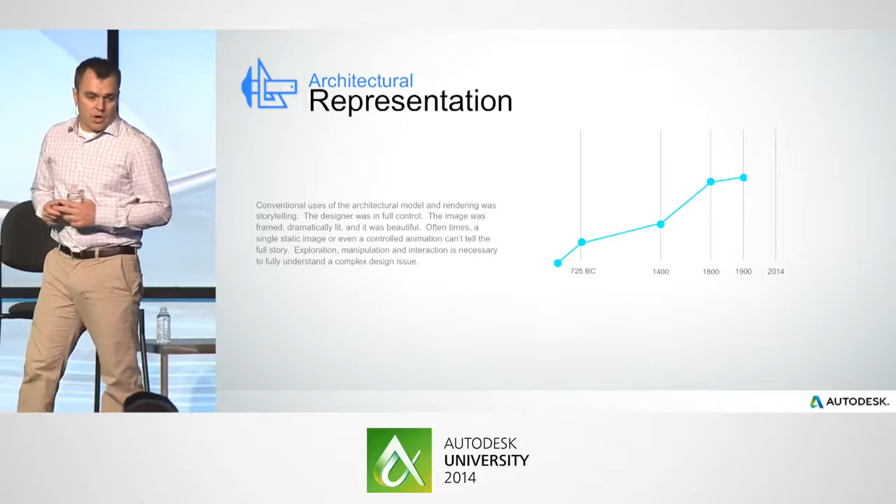Architectural representation: we've been designing and building structures for an eternity. And as long as there's been those built structures, there's been the need to communicate the ideas and concepts behind them. For just about as long, we've been representing these ideas in pretty much the same fashion.

725 BC, the Greeks were communicating design ideas with just their words and scale models. For the next 2,100 years, up to 1400 AD, and through the Renaissance era, some basic drawing conventions were developed. From 1400 AD to today, the basic representations still commonly used today were solidified: the floor plan, the building elevation, the building section, and the perspective.

Through the majority of the computer era, we leveraged the computer to make the drawing and representation of architectural design more efficient. However, we didn't really evolve the process itself. We just made it more precise and more efficient. This is where we still struggle today.

Not everyone that is embedded in these forms of drawing on a daily basis understands them. And oftentimes, those that don't understand it are the ones that it's totally crucial that they understand it, that being the users and the owners.

The widespread use of 3D computer graphics in architectural illustration in the past few decades has helped client understanding immensely.

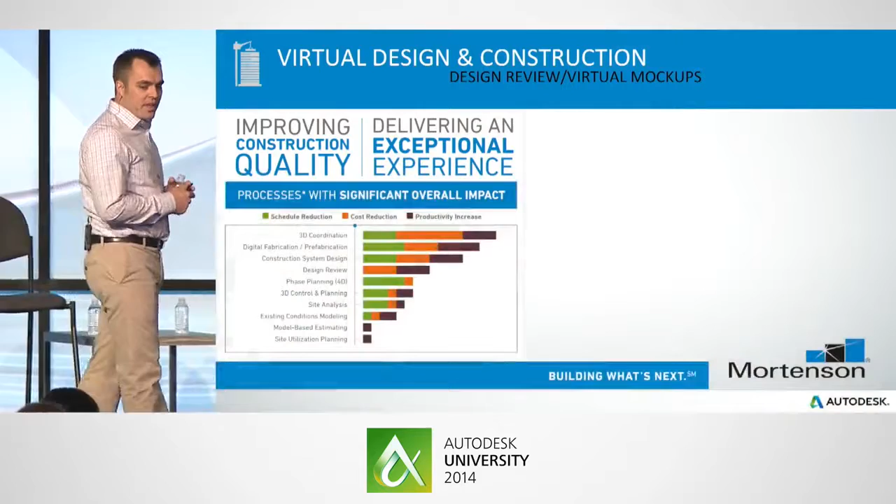A question might be then, why is a general contractor interested in enhanced visualization as part of the virtual design and construction process? This year at Mortenson, we did a research project on our application of virtual design on a lot of different projects. Of our 10 primary VDC processes, the design review with our clients was found to be an integral part of our projects, leading to cost reductions and project efficiency.

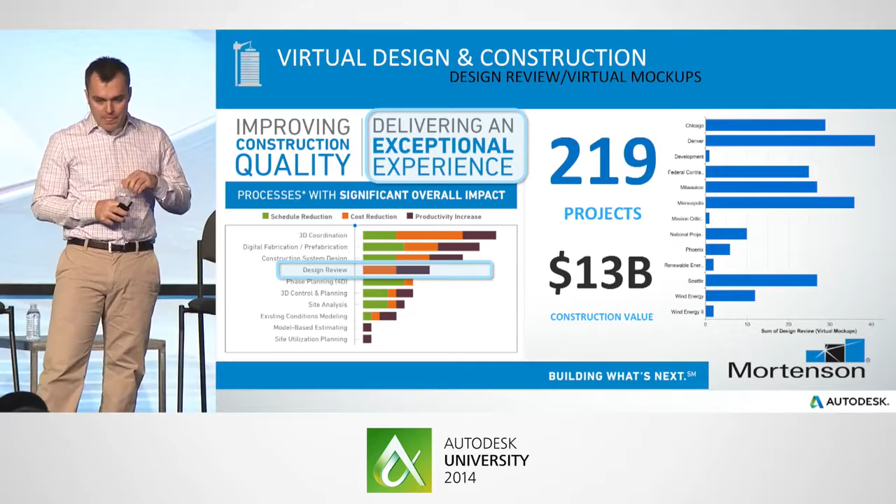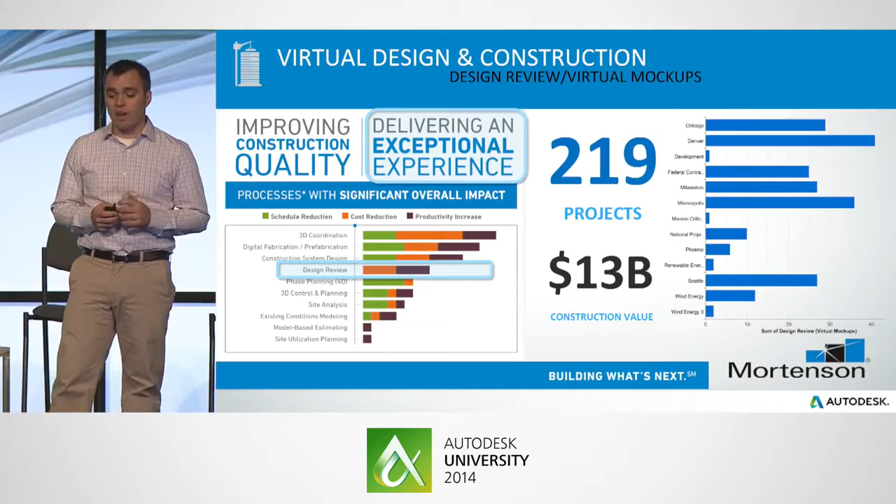By ensuring that we get everything we can out of the design review, we increase our chances of ensuring that the owner fully understands what they're about to spend their money on. Effective design reviews in the design stages also make project teams more efficient by decreasing the architect's chances of having to redraw, or even more costly, the general contractor's chances of having to tear out and rebuild. In the end, both cost reductions and productivity increases provide a better experience for our owner than could have otherwise been realized.

Our goal for design reviews is to enable enhanced decision making. We want the users of the projects to feel like the first time they walk in the building, that it's not really the first time, both aesthetically and functionally. We have found that the more real-time feedback we can provide and the more interactive the review can be, the more effective the review is and the more accelerated the whole process is.

Not until relatively recently have we been able to easily facilitate a real-world perception of distance and scale digitally. There have been solutions for a while, but accessible, affordable, and portable solutions like the Oculus Rift have allowed us to achieve this need. Virtual design reviews have also contributed to reduced cost in physical mock-ups, as a fully detailed virtual mock-up is far less expensive to build than even a partial physical mock-up. It is also easily modifiable and has the potential to be interactive.

In fact, interaction is key to this use and holds proof that a more engaging, memorable, and valuable design review is achievable with more immersive experiences. The interactivity of these solutions is where the true benefit lies.

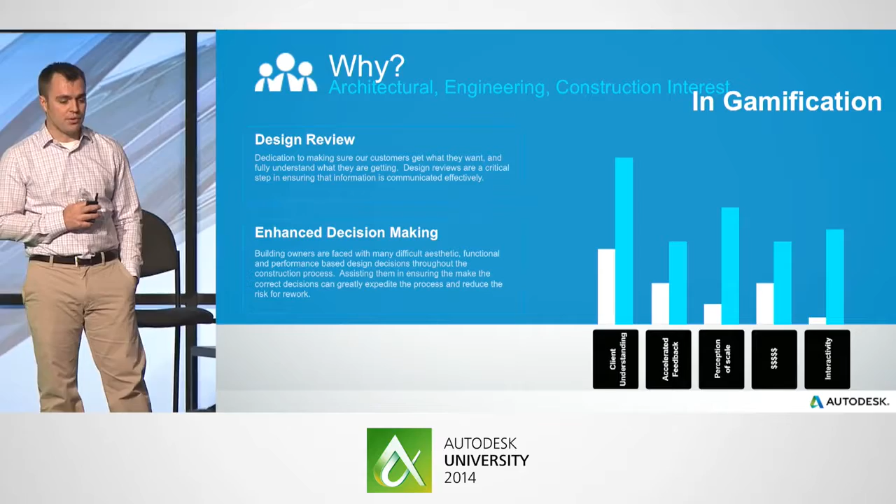As a builder, over the past decade, as we've kept a close eye on more innovative approaches to the conventional 2D and 3D design review, we have strived to ensure that various methods we've looked at make sense. That's where a research project we did recently with the University of Minnesota Architecture Department facilitated this whole thing into really starting to make sense. It questioned the applicability of not only gaming approaches to the design review, but also more immersive approaches.

Because we measure the performance of our processes and teams to drive value-add outcomes, we see it as crucial to ensure there are beneficial ties to more enhanced visualization techniques. This past spring, a graduate student named Will Adams looked at spatial cognition in virtual reality by developing an evaluation technique for our common representation methods in design review.

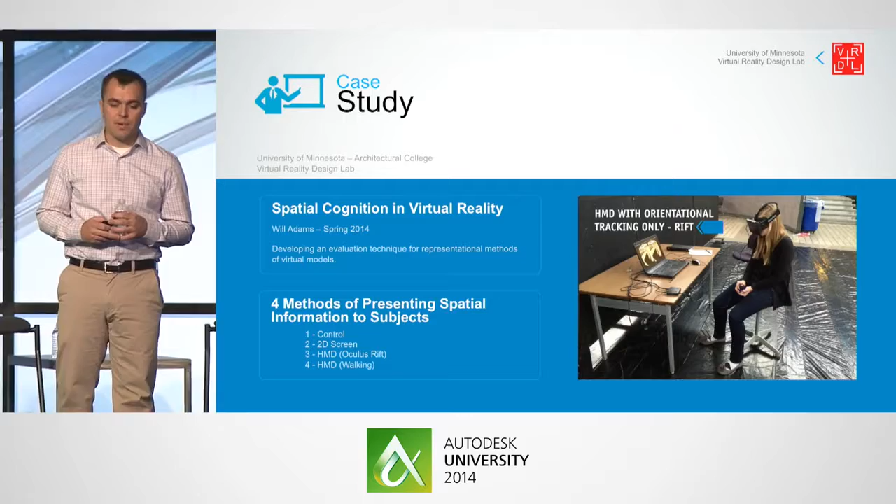The same process took place under a second scenario, except that the subjects were left to assess and recreate the arrangements on a 2D screen. A third scenario took place where they went through the same process with a head-mounted Oculus Rift display in a seated position. And finally, in a fourth method, the subjects made use of a more immersive virtual reality application where they were able to walk and explore the arrangement. They still had a head-mounted display, but they were able to physically navigate.

So the findings of Will's research: he took measurements of each subject's arrangements and documented them based on how much overlap, or lack thereof, was created from the original layout to the layout that the subjects captured with their mind's eye.

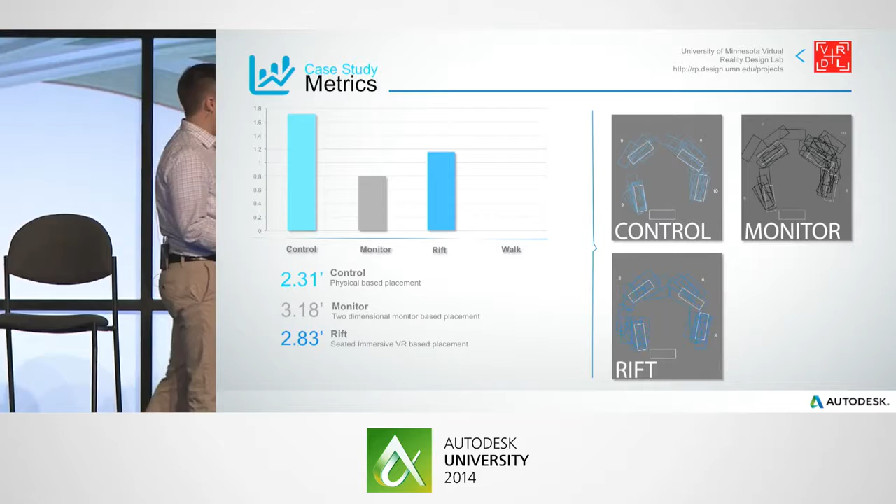So the first situation, the control or physical-to-physical scenario, had the least amount of overlap in the arrangement. The 2.31 feet, as Will mapped out everything they had laid out, was the amount of miss they had in the physical-to-physical scenario. The second solution, the monitor, where we most commonly review our virtual mock-ups, showed 3.18 feet of overlap. The next scenario, the seated Oculus Rift situation, showed 2.83 feet of overlap.

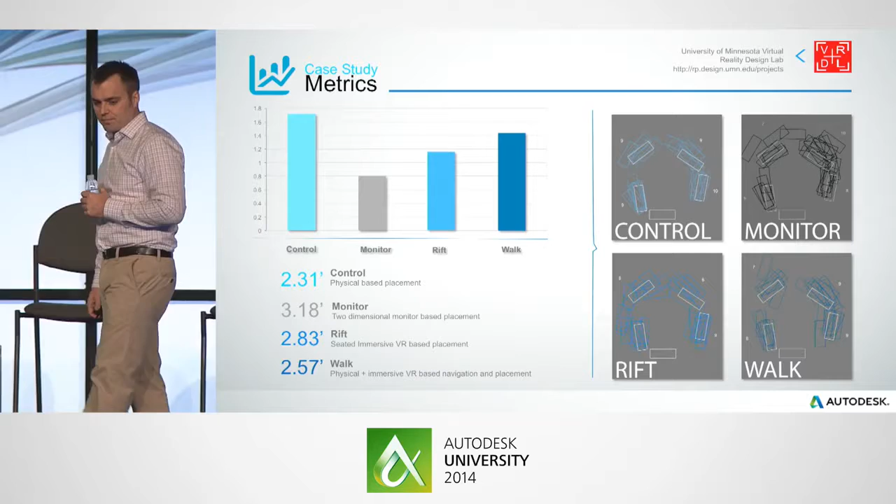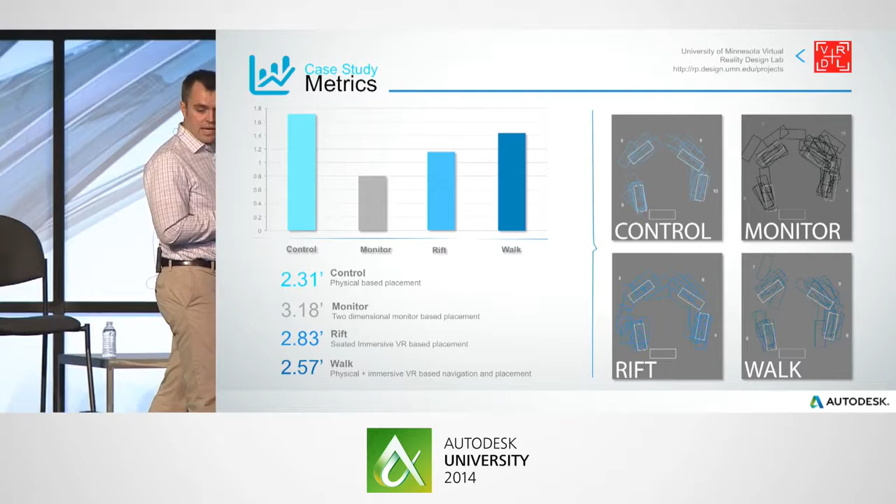And then the final, the walking immersive condition, showed 2.57 feet of overlap. So the outcome of this study resulted in solid proof of concept that a more immersive design review, which was the walking VR solution in this situation, enhances spatial understanding and recollection, thus providing a basic foundation for our approach to leveraging alternate technologies to the traditional 2D design review.

Okay, so some real-world applications for us. The following are benefits we have seen from gaming applications in AEC visualization that we feel would not have otherwise been realized, or would have been much more difficult to accomplish without a gaming workflow. Each application is a different project type with different VDC objectives.

These prototypes were reviewed not only by the leaders of the organization, but also by the users. The mock-ups provided assurance that not only the look and feel was correct, but also ensured them, especially the caregivers, that the medical device placements were correct.

Next example, at the Minnesota Vikings new stadium that's under construction right now, the team made use of Lumion early on in the project. Lumion's built on top of a gaming engine called Quest 3D, so it's not full-blown gaming, but it's still using gaming to leverage our workflow here.

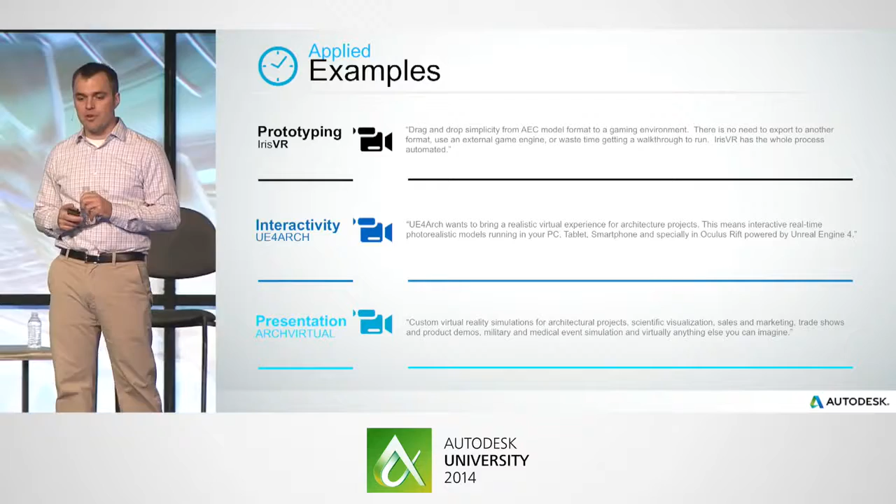Okay, so a few other real-world examples outside of Mortenson. In these, I'm going to show you how technology is being leveraged to produce visualizations that further enhance communication and understanding. All right, so we'll cue the first video here.

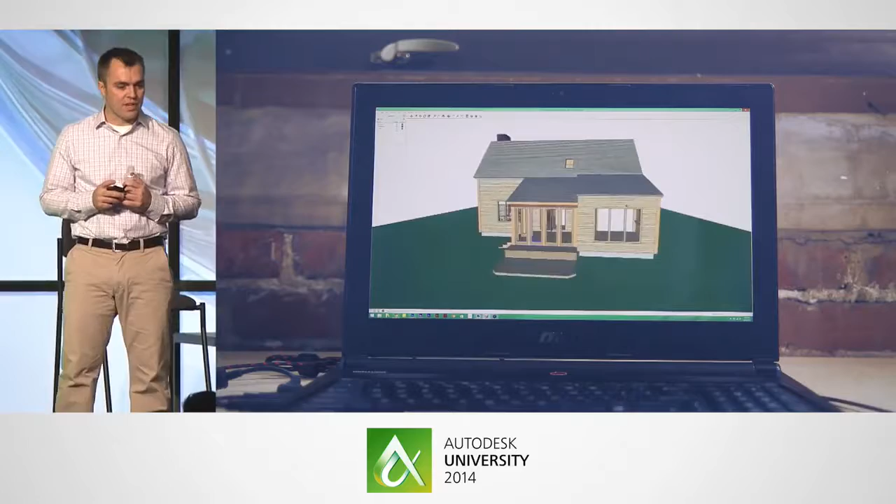This is from IrisVR with a tagline, 'Inhabit your designs.' IrisVR is a startup company that has realized the value and potential of VR applications for the AEC industry. At the same time, they recognize that the true need is not as much to produce gaming environments, but to enable their users to do it easily and quickly.

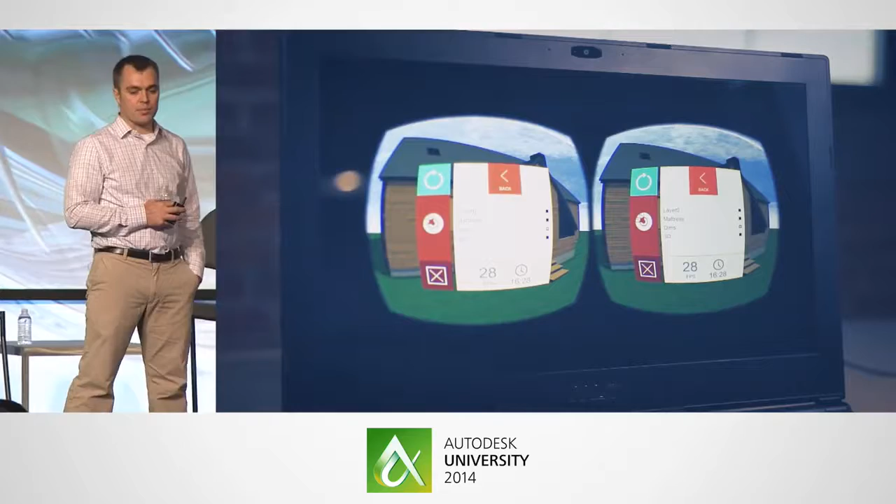If we are making use of this technology in a design review, our process can't be change and wait, change and wait. It's got to be change and assess. By allowing us to speed up this process, by letting the computer do the back-end work of porting a design model to a gaming engine, making unexpected changes becomes a lot less time-consuming and can be accommodated during a design review. IrisVR currently has a beta product that is compatible with SketchUp and is working towards a final product that allows Revit models to be integrated directly with their software.

In the next example, which is from a company called UE4Arch, they're a company that sees the potential in VR technology in the AEC industry.

The example on screen right now is an example of where I hope we'll probably be a few years from now on the common project. What UE4Arch is doing as a company is striving to deliver architectural experiences to projects while doing it in real time. They're producing some extremely compelling interactive content developed specifically for the Oculus Rift.

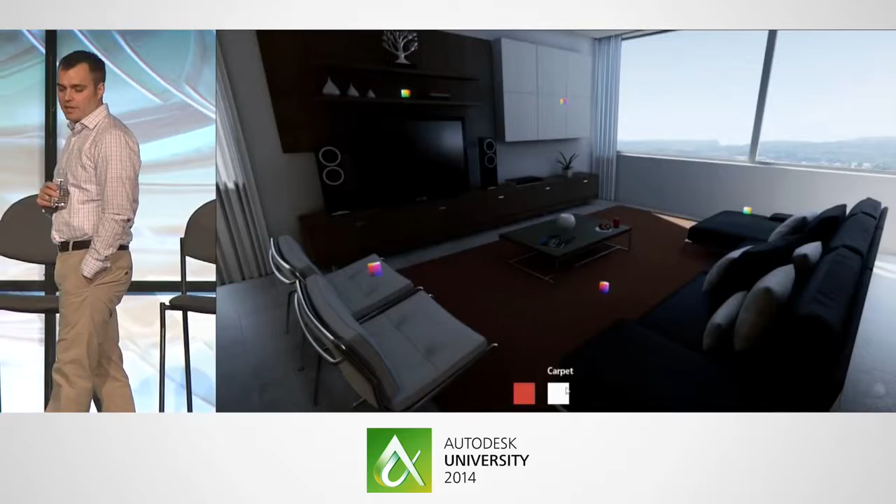In the example, you can see the user navigating around the space. Pre-programmed modifications with interactive menus and information assist the user in manipulating the environment to their liking. By providing projects with interactive content, users are much more easily engaged in the process. As you can imagine, the results of a design review have far more potential than reviewing 2D elevations and material samples, as a review has the capability to encompass the entire context of the project.

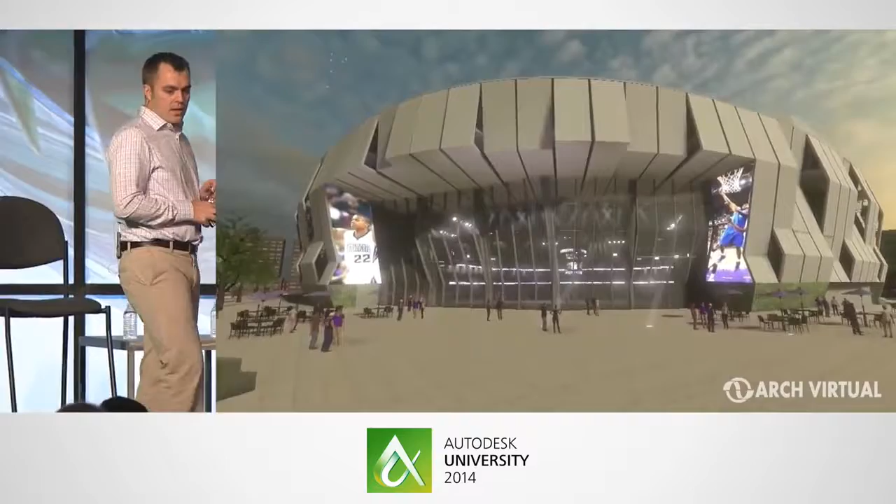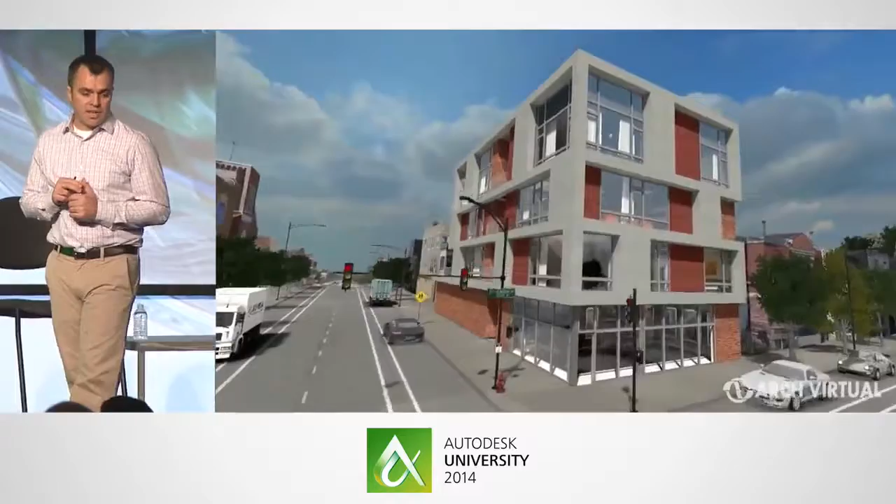In the final example here, it's from a company called Arch Virtual. Pretty interesting company, composed of an architect, a group of really talented game creators, and CG artists. They're creating fully customized virtual reality simulations for architectural projects. In addition, they have a bit of a broader scope, where they approach scientific visualizations, sales and marketing, trade shows, product demos and training. They're also doing medical event simulation.

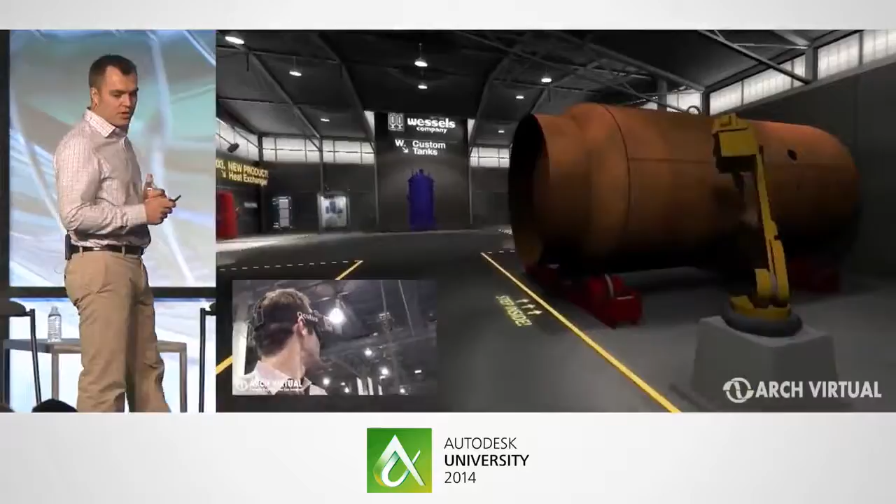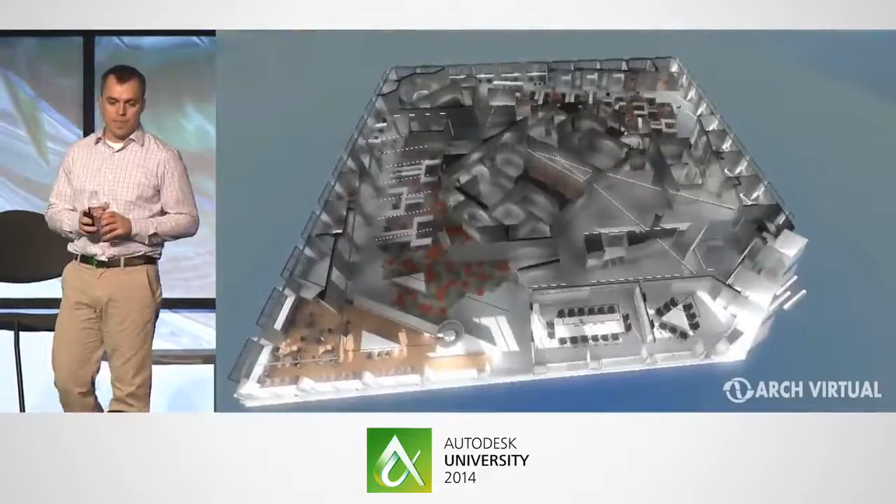So while the video is impressive, when you start to really think about visualizations cross-pollinating in this manner to other industries, like you're seeing right now on screen, there are huge benefits. Not only can interactivity be provided, but easily digested information can be overlaid in the review. The potential for this approach to gaming and VR solutions has the potential to go far beyond the design review. Training project staff on their new facility, or operations and maintenance startup, might look totally different in the near future as we start to engage these technologies.

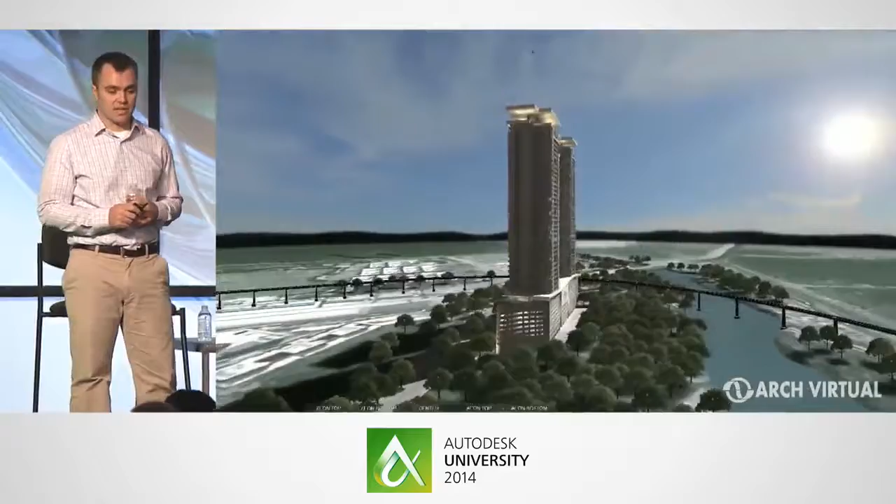So the question is, will these technologies immerse us into a digital world, or augment and enhance our physical world as we currently know it? I think it's probably going to be a combination of both.

Technologies and devices such as photogrammetry for rapid content creation will make generating accurate content for these visualization techniques much easier in the future than it is today. Improvements in CPU and GPU speeds will lend to real-time physically based renderings. Also, VR device improvements such as the Oculus Rift Crystal Cove will lead to monumental improvements and ease in a more immersive design review.

The third item here is a little bit about our social network society that we have going right now with Facebook and Twitter. I think it has the potential to lead to vast improvements in architectural design review through solutions like mass gaming, or potentially even newer social technologies like crowdsourcing to get feedback, just because we can get a wider range of feedback in those types of scenarios.

In addition, physics simulations, I think, will likely play a large part in future virtual mock-ups. In the end, I think the AEC industry will continue to borrow from high-performance gaming solutions. However, real-time solutions, I think, still need development right now.

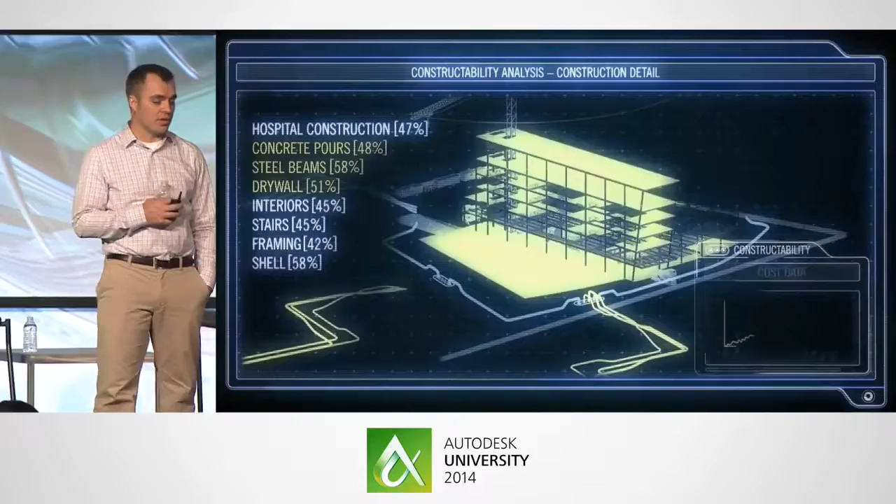So, two last quick videos. Autodesk published a video almost 3 years ago now, highlighting some of these future technologies, and it's still spot on with what really excites us as a company today. Reason being, it closely addresses a connection of the virtual and physical.

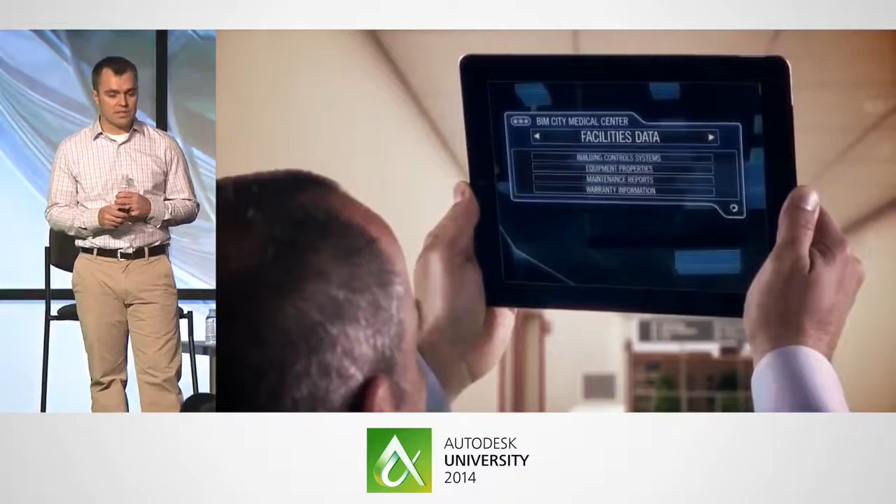It's quite obvious that this is a world we'll be living in in the very near future, if we aren't already. We will continue to blur these lines of the existent and the non-existent to improve not only what we build, but also how we build it. New hardware and software technologies are just around the corner that will make enhanced visualizations something that is ubiquitous with our being. All of this will enable us as an industry to not only pre-visualize, but also deliver a better product.

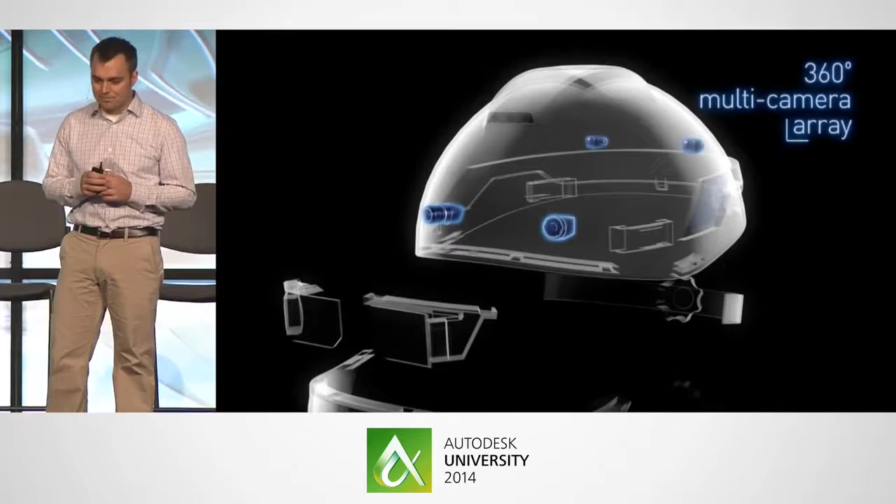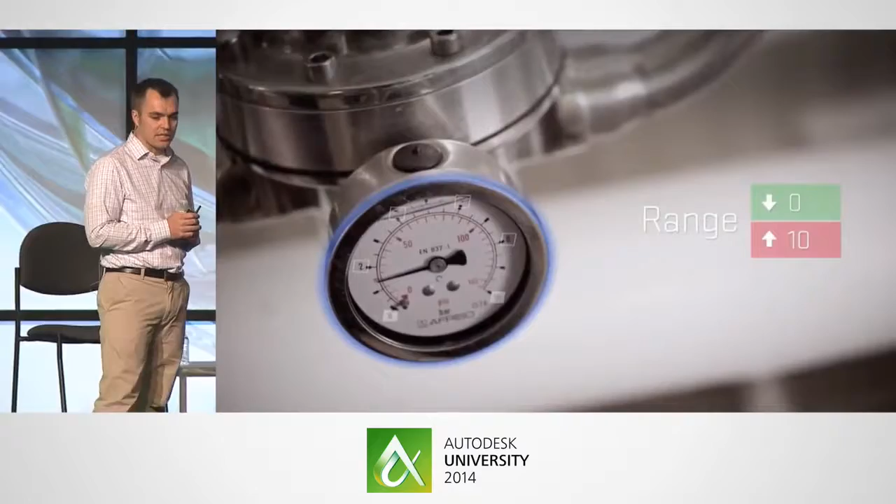Our last and final video is from a company called DAQRI. They created what they're titling right now the Smart Helmet. The DAQRI Smart Helmet is a fully immersive, or fairly new concept for a construction hard hat. It was unveiled by DAQRI in early September. They're a leading AR developer that has recognized a huge need for such a device, and have a very disruptive concept off the ground. The core of the concept revolves around real-time information overlaid on the physical contextual environment.

While it's providing information, it's also gathering it, all the way from pictures to video to 3D geometry. When you start to think about the enhanced visualization potential with technology like this, it gets really, really exciting. It's all very impressive, but the most important thing about this device, I think, is that it's designed to coexist along our industry workflows. Will the use of gaming and VR be game-changing for the AEC industry?

That's to be determined. But I can say for a fact that if we don't fully assess the issues we have and improve these new technologies strategically, the game will not change for the better of the industry. We need to look deeply at the current and past methods of architectural representation, the current context, and only adopt these strategies when they provide real-world value while improving the experience of the viewer and improving the facilities we are constructing. Thank you.